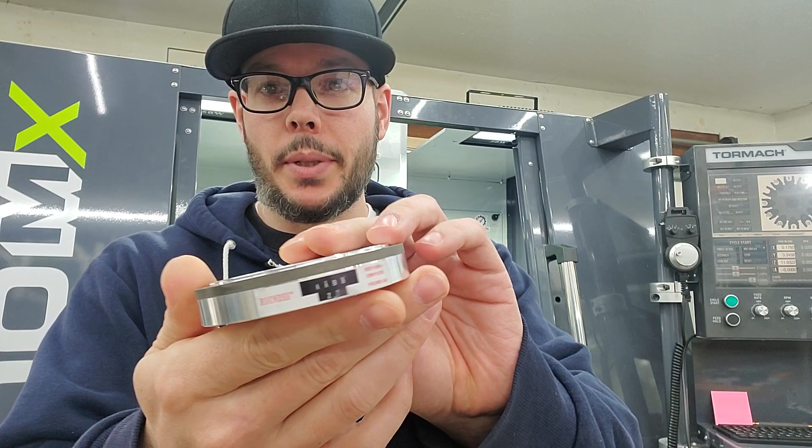Got into the process of doing it, and the encoder ring on my machine, you have this little bit of tape that covers it up, and I'm not sure if they're normally glued in, and just this one didn't happen to be. Well, the tape comes off pretty easily once all the oil, when the mist is flying off the flood coolant and it collects up there, it gets oily, and this tape came off and flung the magnet out.

And I was talking to my buddy Travis, and he was like, it's probably in there, you can take a look. And I was like, there's no way, because I set up the ATC, the tool changer, within the first few days of assembly, and once that's set up, it doesn't need the magnet that's embedded in here anymore. It's got the encoder device that's mounted inside, and then the magnet sensors in this ring that spins with the belt.

So I assumed the magnet was gone, and then I happened to actually find it after I made a temporary fix. I just glued in my own neodymium magnet into the one that's already in there. I contacted Tormach about the problem, and they got me a new one sent out, so I have a whole new encoder kit to install, but I just made a quick fix to test it out, and I was curious to see if it'll work.

It did temporarily. I don't know how long the glue that I put in there will hold up, so as soon as it defects again, I'm going to install this new kit that they sent out. I just wanted to go over the process really quick. It's insanely easy to set up in Fusion 360. I'm going to go ahead and grab the camera around.

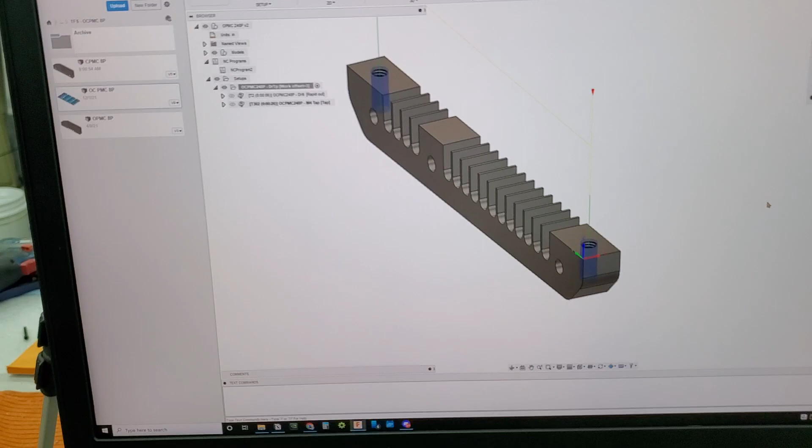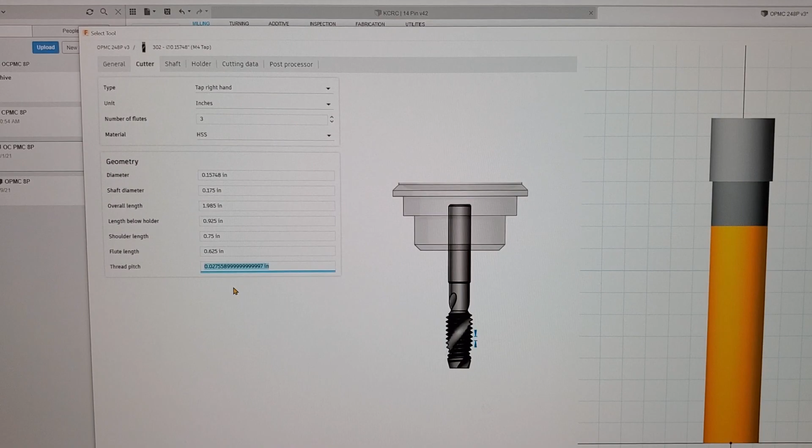So literally all you have to do is set up a drilling tool path and set up your tool. So we have an M4 tap. All you do is plug in the pitch, which 0.027559 basically is the pitch for an M4 screw. You can look up all these online.

An M4 is actually M4 by 0.7. Well, that 0.7 is in millimeters. You convert it over. I think you could probably type in 0.7 millimeter in there, and it'll automatically convert it for you. I think that's actually what I did. And then once you have your pitch in here and you set up all your other parameters, you set up your tool numbers and everything, and you're good to go.

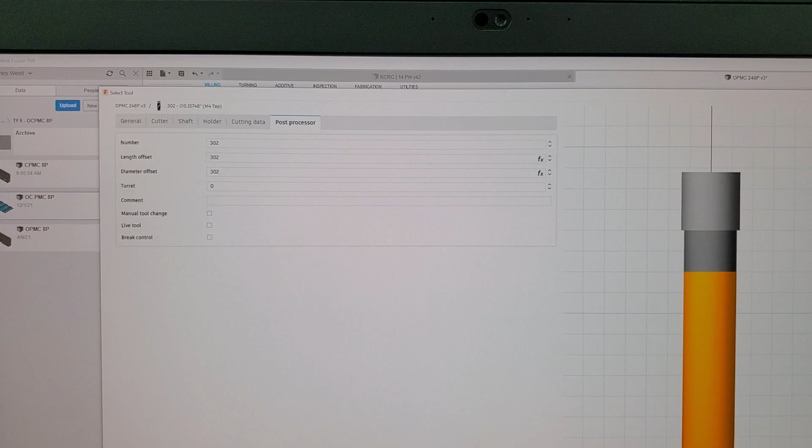I set this up as a right-hand tap. You see right here, the setup is the type. Let me see where I'm at. There we go.

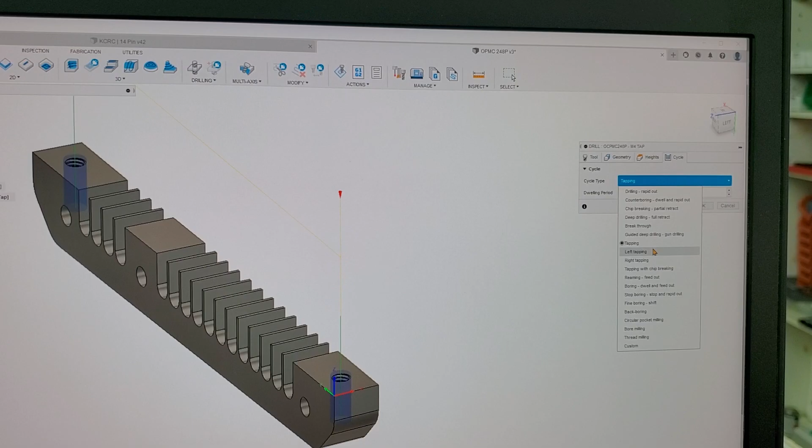I set it up as the type as a right-hand tap. So the other thing is, if you're setting up a tapping cycle, you can choose what you want to do, if you want to do right hand, left hand, or just tapping. I have it on tapping. When you have it here, it will default to the type of tap that you set up.

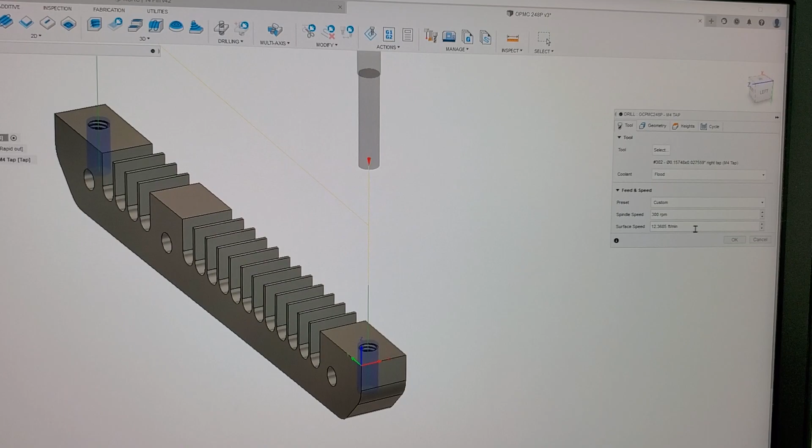You can see there: tapping. Tap right or left handed threads depending on the selected tool. So that's how I have mine set up right now. You plug in your RPM and then your surface feet. It'll automatically calculate this, and then it automatically calculates your feed rate that it'll go into the part with. So that's all I did.

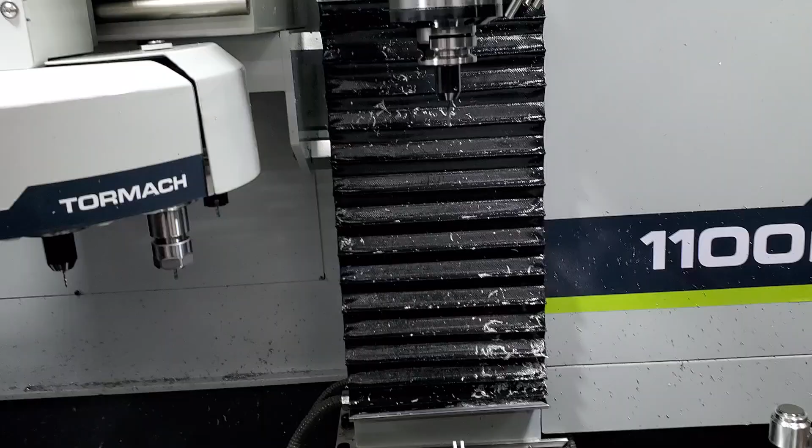I just want to do a quick one, and then talk about the live streaming and other stuff I got going on. So then run this code here. I already got it all set up.

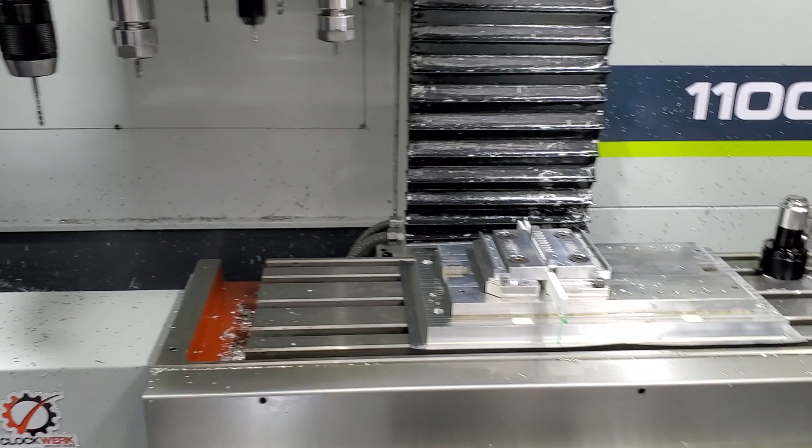Go ahead now, and it'll grab the M4 tap. I'm actually using it right here in a drill chuck. It's not an ideal tool holder for this. Excuse me. For this, if you're gonna set it up, you probably want to do it in like an ER collet or something.

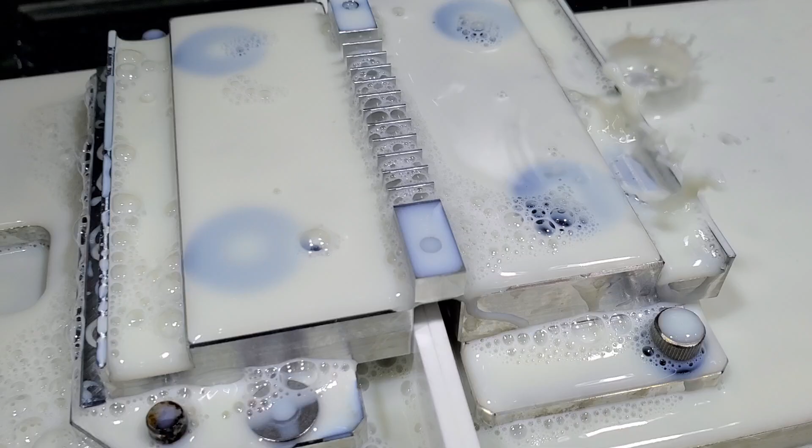But yeah, it works really well. Like I was saying before the air nozzle interrupted me, if you are going to be doing a ton of holes in like bigger, like, you know, 1/4-20, 3/8, you're going to want to get a heavier duty setup for it.

But just doing M4s and 6-32, 5-40, 4-40, that's what I'm pretty much doing most of the time. The drill chuck seems to hold up pretty easily. I'm also only really tapping in aluminum and acrylic. So yeah, that's pretty much all I wanted to do for this one. Just a quick video on rigid tapping in the 1100 MX.

Super straightforward. I should have had that set up a while ago. Would have saved me a couple thread mills. And it's actually really predictable and easy. With the thread mill, you kind of got to tweak your code a little bit to walk it in and get that perfect thread. But with this, you just set it up and go. So I'm really happy. I'm going to be using this a lot more. So that's really all I wanted to do for this video.